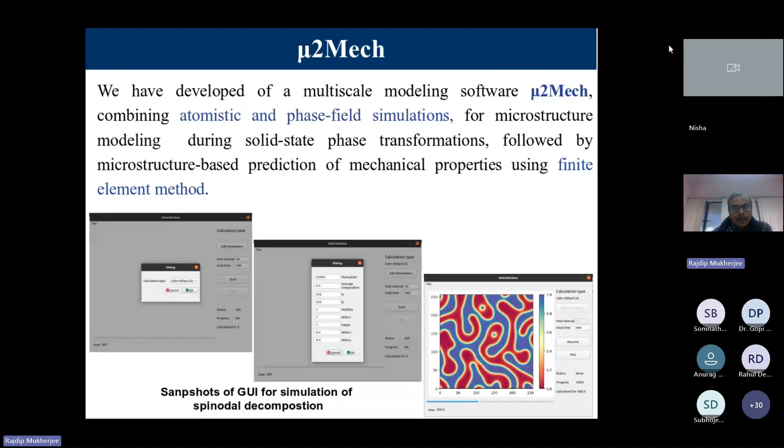So next up, I am showing you a few online resources. This will be shared with you after this workshop. So the first one is the GitHub link where we have the open source software, as you know. So you will get the source code for this μ2Mech, right?

So there is a background C code there, which is for phase field modeling. And see all these source files for μ2Mech, because in μ2Mech, the front end is a graphical user interface, but in the back end there is a C program running, which is solving mostly the differential equations related to phase field modeling, right? And those codes will be available on github.com, and also the installation procedure.

It is already installed in Param Sanganak, but you may want to install it in your own laptop, which has a Linux system or Ubuntu or CentOS. So you can directly download from this GitHub link, and then you can install it in your own desktop as well. Okay.

And then I'll provide you a link of a paper which we published, which is μ2Mech, a software package combining microstructure modeling and mechanical property prediction. And this paper contains all the screenshots of the software, how to install it, what are the basic algorithms that we have followed in this software, the example of iron chromium alloy, how we simulated this thing, how it can be exported to OOF2.

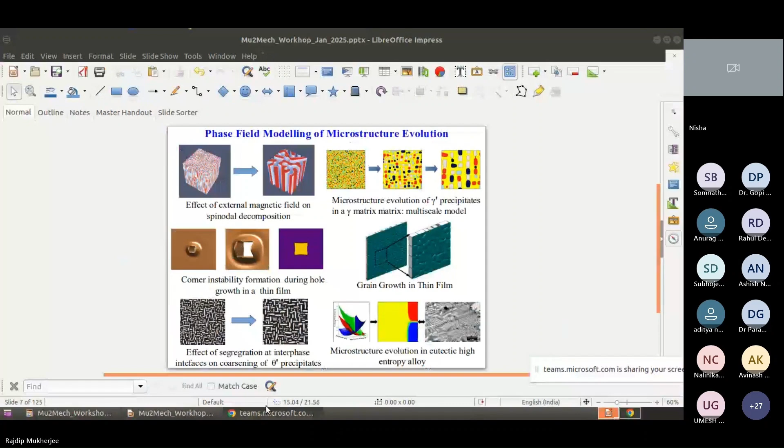Ms. Agarwal, just there is a call. Yeah, I think you are not audible. Oh, sorry. I think I am not audible, right? Yeah, now I am audible. Now it is fine. Yes, yes. Yes. So thank you. So I will start again.

So the first figure you can see is the effect of external magnetic field on spinodal decomposition, and I will go more into spinodal decomposition later, where we'll see this is a two-phase microstructure evolution, and one of the phases may be ferromagnetic, one of the phases may be paramagnetic in nature, and using an external magnetic field, we can align these phases in particular directions, and we can change its properties, right?

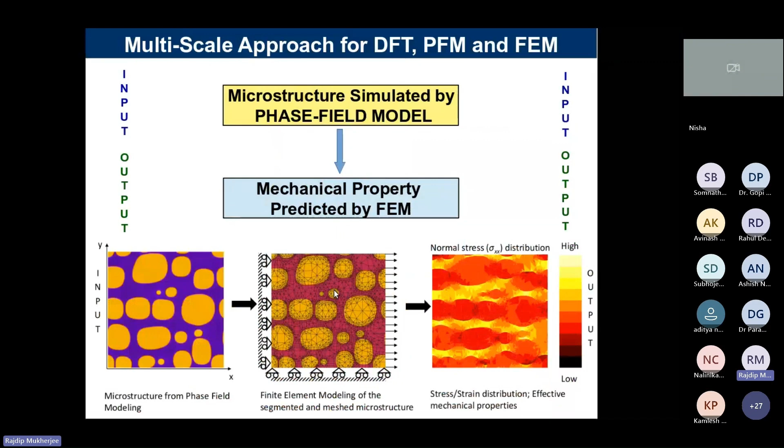So next, this microstructure prediction will be done using OOF, object-oriented finite element software tool for predicting effective properties from the microstructure. This is an open source software based on Python and C++ and can be integrated with other open source software and can be used to analyze two-dimensional and 3D microstructures as well. So this is a fully capable standalone software and its generated 2D/3D mesh can be exported to commercial finite element softwares for elastoplastic and other nonlinear analysis. But most of these things will be discussed in the second demonstration.

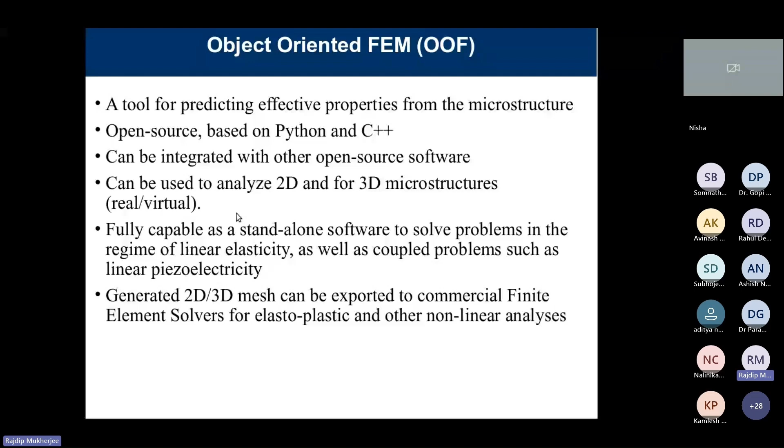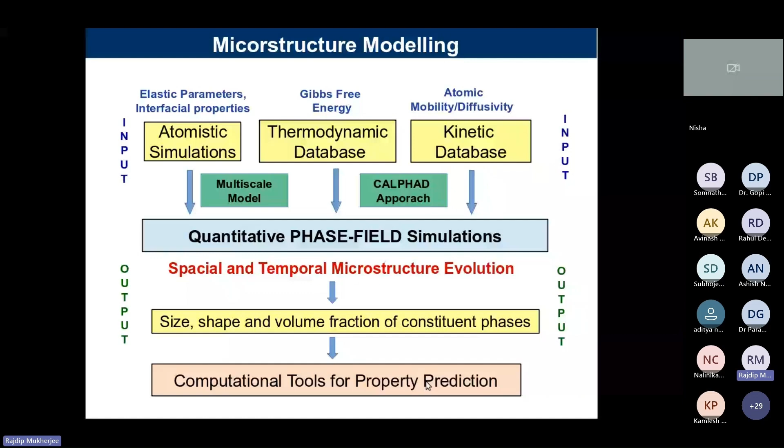But I am skipping this part because this will be covered by Albert in the first demonstration session in the afternoon. As I told you, there will be two demonstration sessions. One will be the front end of the software, and you will get a hands-on session for the graphical user interface. There will be some post-processing tools also involved. That is the very important part. That's demonstration one and the hands-on session. And the second demonstration will be related to mechanical property prediction, which is related to the OOF2 software.

So now we know that. Till now, does anyone have any question? Because this forms the basic background of the software. If you have any question, you can ask me. Then I'll go to the next part of this lecture, where we'll discuss some examples of phase field modeling, microstructure evolution, and also discuss a little bit about the solid solution model. So if anyone has any question or any doubt, please ask me. If not, then I'll go to the next slide.

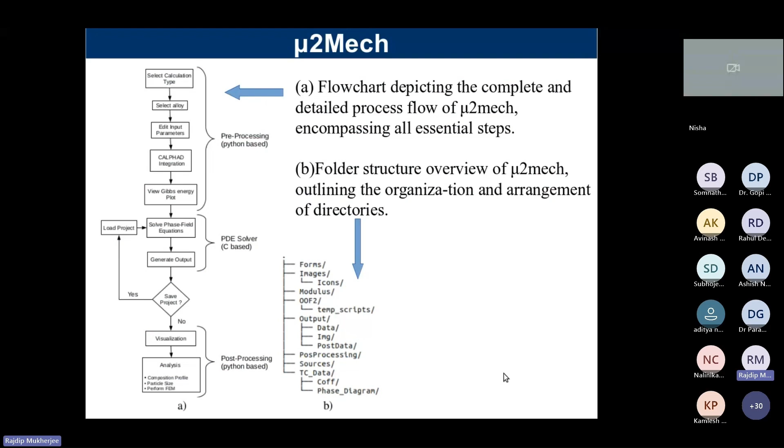Now we'll discuss. There is a question in the chat. Yes, what is the question? Can we check the microstructure evolution of eutectic solution? Eutectic solution. I don't get it. Is this question in the chat box or somewhere? Yes, in the chat window. I'll just check the chat.

Sir, can we check the microstructure evolution in eutectic solutions? Yes, it is possible. Microstructure evolution of eutectic solution is a phase field model, although it is not integrated right now with M2Mech, but because this is open source software, we can always add the modules. Eutectic solutions are basically where we have a transformation from one liquid to two solid phases, if it's a simple binary alloy. There may be ternary eutectics also, or multi-component.

But we can think of simple binary eutectic alloys such as lead-tin eutectics. That kind of thing you can do easily. There you can see the solidification of the alloy, and that is also a diffusion-controlled process. A liquid phase is transforming into two solid phases. I have shown you for the high entropy alloy in a slide where we have all the examples. So I will go back quickly.

Yes, sir. So here you can see this is the eutectic solidification, right? In a high entropy alloy. Yes, tell me. Yes, sir.

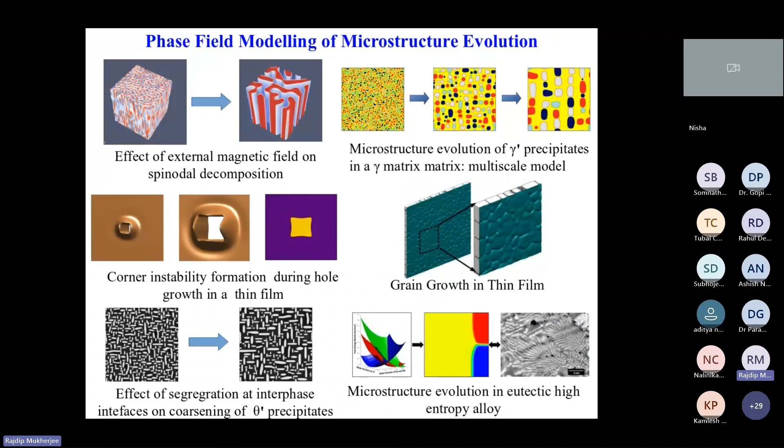So now we are going to a phase field model. What are the basics of phase field model? In the next half an hour, probably I'll cover this example of phase field model and also a little bit of solid solution model. A phase field model is a diffuse interface model. Analytical models are mostly sharp interface models, where there's an interface you need to track between the two phases.

So we are mostly discussing multi-component, multi-phase field models, where the alloy has more than one element and multiple phases are involved. For simplicity, in this workshop we are only working on a binary alloy. Binary alloy means two component alloy, and there are two phases. But it is also possible that three phases are involved, like in eutectic solidification: a liquid and two solid phases.

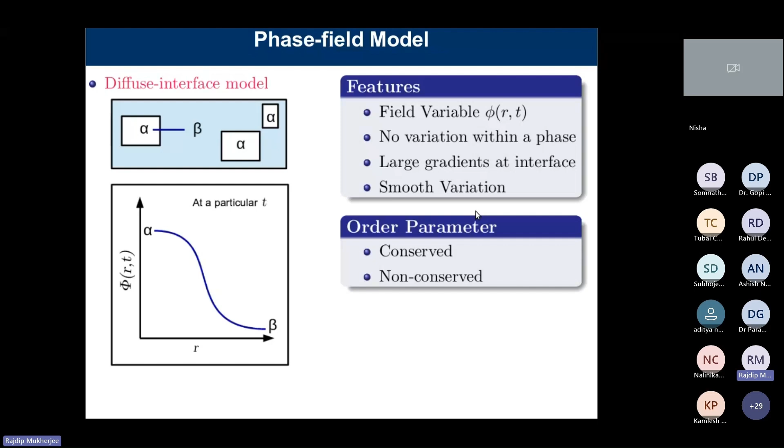For these conserved and non-conserved field variables, we generally solve two very basic equations, and there are some more complicated variations of these equations. One is very similar to our diffusion equation. Many of you know Fick's second law, right?

So what is the driving force for atoms to diffuse? These are all diffusive phase transformations, whether solidification or solid state phase transformation, where phase separation occurs. If you have A and B atoms, A-rich and B-rich phases form during phase separation, and diffusion is involved. So in Fick's law, what is the driving force for diffusion? This is the concentration gradient, right?

And this concentration gradient basically drives the diffusion. So there we can see the diffusion equation, which is like del C del T equal to D grad square C, right? So the atom moves from higher concentration to lower concentration, right? Like a drop of ink in the water, it will diffuse into the water, right?

But here we are solving an equation which is very similar to a diffusion equation, which is del C del T equal to M grad square mu. And this mu is the chemical potential. M is the atomic mobility, C is the composition, T is the time, right? And you can see here.

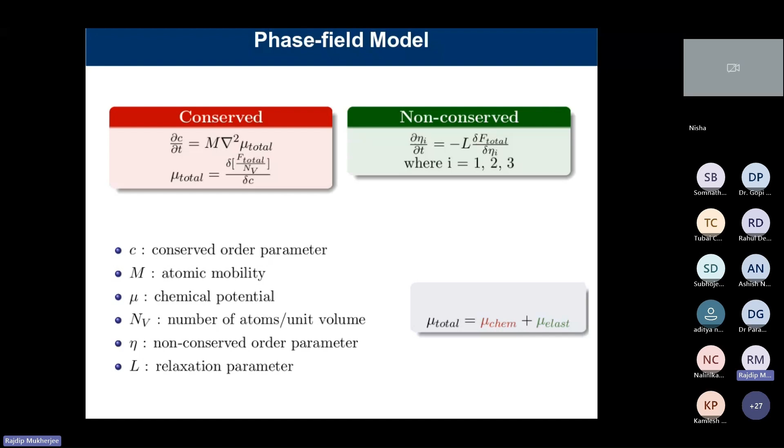But if you want to calculate the effect of a magnetic field, then there will be another mu magnetic. So the chemical potential will have several parts. The chemical part will always be there, and there will be an elastic part. Electric, magnetic, all these things can be incorporated so that you can see the effect of external fields on microstructure evolution. So this is a very simple kinetic equation that I am showing you.

And then, as I told you, this F total can be F chemical and F elastic. And F chemical is the bulk free energy and the gradient free energy. The bulk free energy you get from the phase diagram and the free energy diagram. And gradient free energy is related to your interfacial energy. That is the chemical part of the free energy.

Whereas for the elastic part of the free energy, when we try to calculate the elastic energy, we basically have to solve the mechanical equilibrium equation. And mechanical equilibrium is much faster than the diffusional process, because the atom has to move only a fraction of the atomic distance. So the elastic equilibrium is very fast. So we assume that at every diffusion time step, the system is in mechanical equilibrium.

So that is why we solve a mechanical equilibrium equation to get the displacement field. From there, we can get the strain field. From there, we can get the stress field, and we can calculate the elastic energy of the system and incorporate it in the total energy of the system.

So the bulk free energy part we can get from Thermo-Calc or the CALPHAD approach. The gradient free energy, the interfacial energy, we can get either from literature or from atomistic simulation. For the elastic part, we need the elastic constants from atomistic simulation and the misfit strain. Then by solving the mechanical equilibrium equation, we can get the elastic energy.

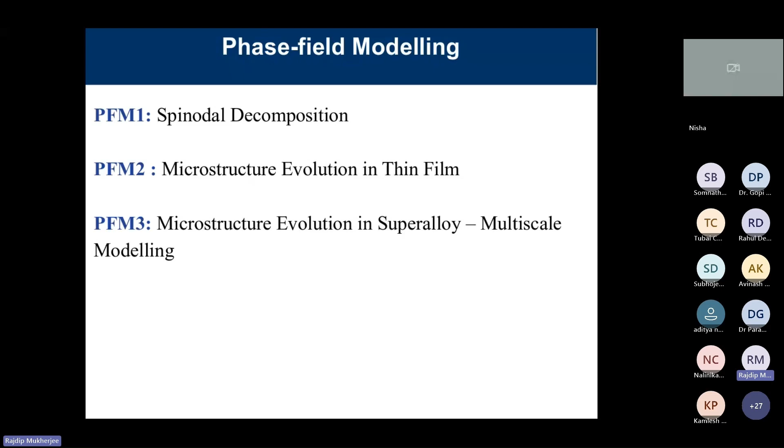And it is very important not only for metallurgical systems, but also for polymeric materials, where you can have this kind of spinodal decomposition take place, right? In functional materials also, like ferromagnetic to paramagnetic phases. So we start with spinodal decomposition. This is a kind of phase transformation, like eutectic solidification or precipitation. This is also a kind of phase separation where an alloy decomposes into 2 or more phases, right?

Say for magnetic systems, one of the phases may be ferromagnetic embedded in a paramagnetic matrix. So it can form hard magnets, because when you have small ferromagnetic phase-separated phases embedded in a paramagnetic matrix, and you align them in a particular direction, they can act as elongated single domains. So in magnetic materials, hard magnets, this is very, very important.

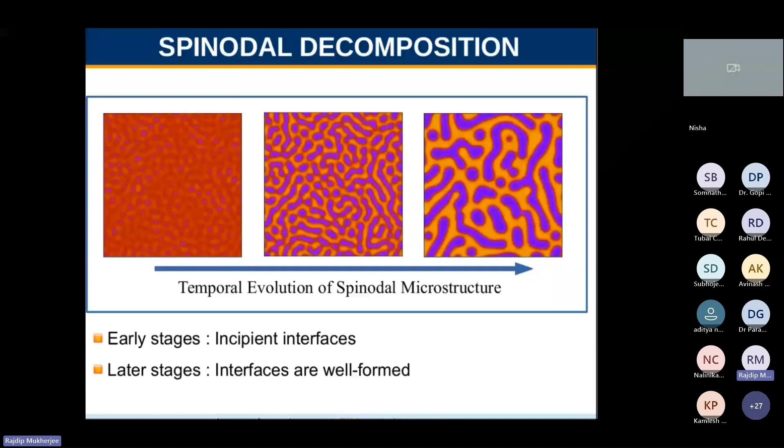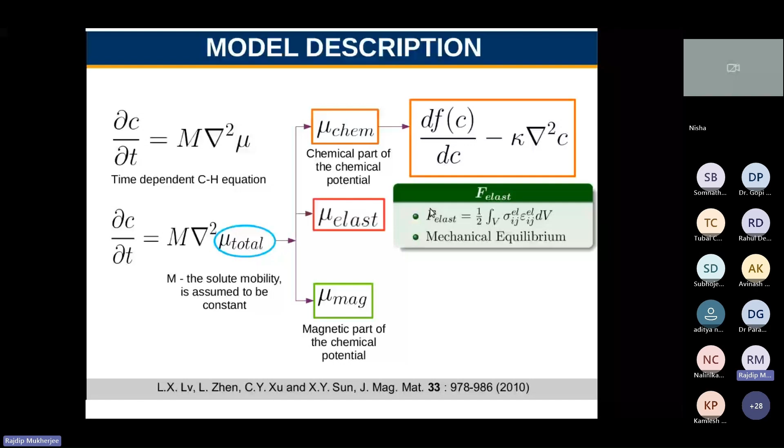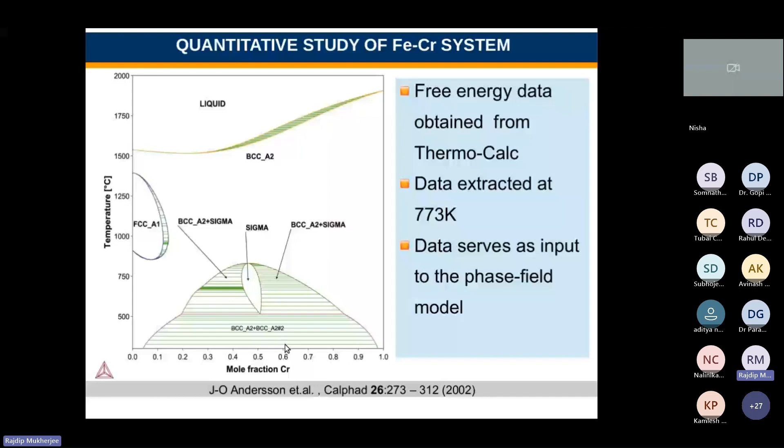So what is the CALPHAD approach? Because we are talking all about the CALPHAD approach where we get this free energy, right? So the CALPHAD method enables the calculation of phase diagrams. Unless you know the phase diagram of an alloy system, you cannot simulate what will be the microstructure, right? So the phase diagram and the free energy diagram are the two important thermodynamic data sets we need to simulate microstructure evolution.

The kinetic data set is also important because it tells how quickly it is evolving, meaning what will be the time scale. If you don't know the diffusivity value, you cannot tell what will be the effect of temperature, say, right? With increasing temperature, the diffusivity increases in an exponential manner, right? So those things we can get using the CALPHAD approach.

And software like Thermo-Calc, OpenCalphad or Pandat all have student versions also, where you can get defined databases like aluminum, silicon, iron, copper, nickel, titanium. All these databases you can load in the software's calculation program. And then you can get graphs and tables, meaning you can get the phase diagram, the free energy diagram, and free energies as a function of composition, right?

So it is very important: if you learn this CALPHAD approach, you have a good understanding of the phase diagram and the free energy diagram of a system. And when you plot the free energy diagram, you can see this is a particular free energy diagram for the iron-chromium system without a magnetic part, where again the free energy is a double-well kind of potential, and when you incorporate the magnetic part, it will look like this.

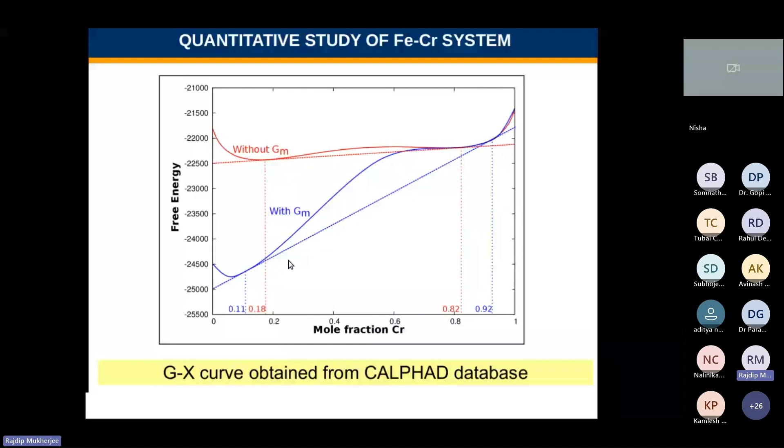This data is very important because if we feed it as input to a phase field model, we can see how the microstructure evolves with time. So how do we solve this differential equation? We solve it in Fourier space. We can use different numerical techniques like the finite difference technique or finite element technique. But here we solve the partial differential equation in Fourier space, because in microstructure evolution we are basically solving a very small part of the microstructure, which is periodic in nature, right?

And what is the advantage of solving in Fourier space? Because it's a 4th order equation, it becomes a 1st order equation in Fourier space, the numerical stability will be much higher, and we can solve it very easily, right? So the solution is very fast. And this is a semi-implicit Fourier spectral technique, which you can also find in the literature, for how we solve this differential equation in the background.

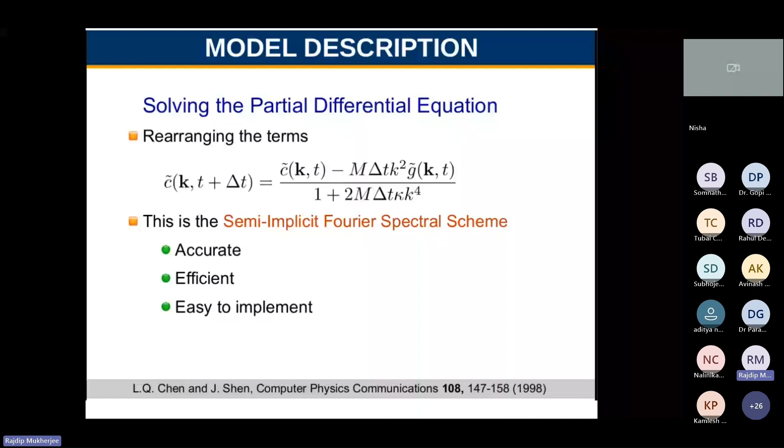So numerically, why semi-implicit Fourier spectral? As I'm telling, there is a maximum allowable time step, delta T max, right? We are going in time, right? With time, how it is evolving. We can use a larger time step in this case, so the microstructure will evolve quickly in our computers. So that is why mostly we use this Fourier spectral scheme.

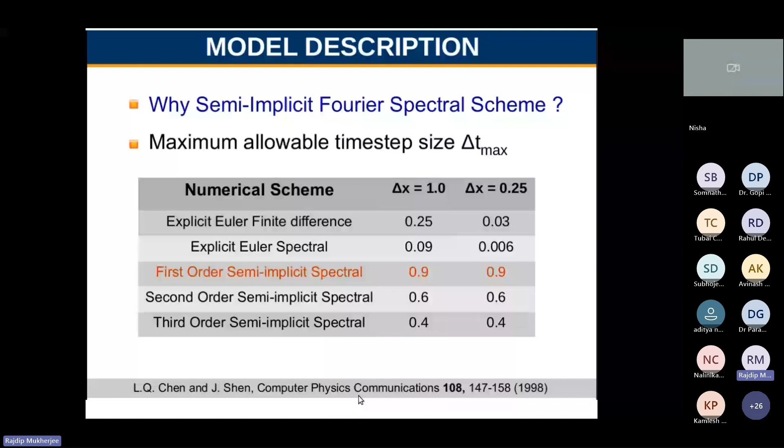So you can follow this Chen and Shen paper in Computer Physics Communications that describes this numerical technique in detail, how we can solve a partial differential equation using the Fourier transform technique. Then these are the microstructures where you can see this is no external field, this is only elastic field or only magnetic field, and you can see what is the effect of elastic field and magnetic field on microstructure evolution, right?

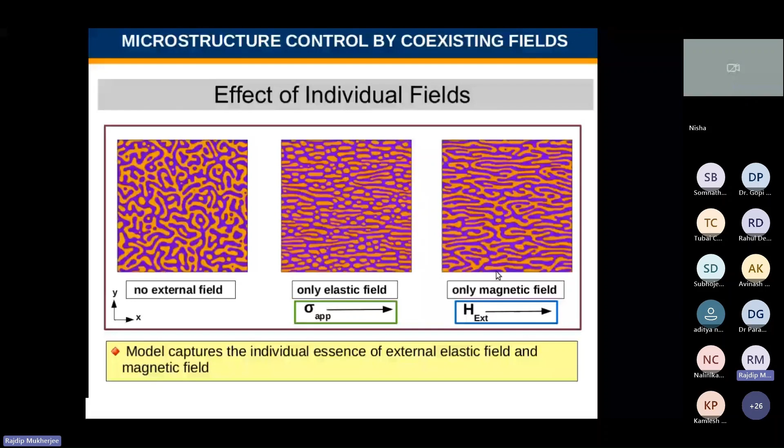Okay, so there is something like AI/ML these days people are using, artificial intelligence, machine learning. So from this μ2mech, you will get a set of data, right? The microstructure at defined composition and defined temperature. And this kind of data can be used for AI/ML applications as well, right? Because if you want to simulate large microstructure for an alloy system, it is time consuming, right? But with fewer calculations, machine learning techniques can be used for generalized time dependent series, and it gives a significant reduction in time and computational power requirement.

So data which we are generating from μ2mech, means a set of microstructures or set of compositional information at different temperature, different time, you can use as a training data set for an AI/ML model, like an LSTM kind of model, long short-term memory model. If you know, some of you; I am not discussing this thing. This is not part of μ2mech, but you can always use this data set as an input, a training set for a machine learning model. And then this machine learning model you can directly use for prediction of microstructure evolution quickly.

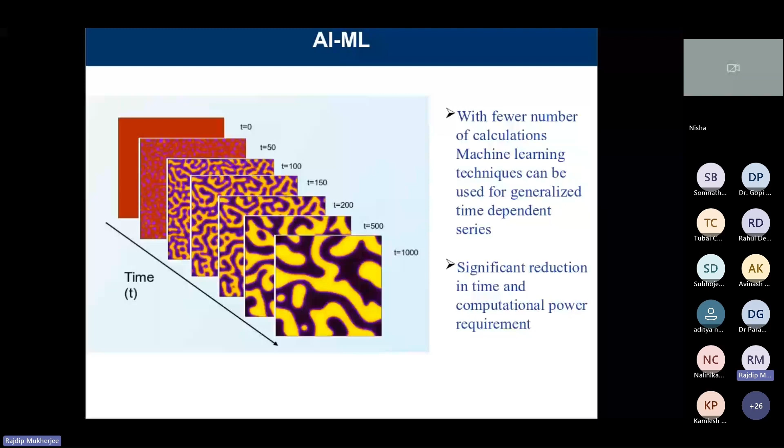Okay, next, I'll just quickly discuss, we don't have much time left. So I'll quickly discuss what is a solid solution model, because that is what we are using in CALPHAD, right? And these solid solution models are incorporated in our phase field model. So a solid solution model can be ideal, regular, subregular solution model. And in the CALPHAD method, we use something called Redlich-Kister polynomial, right? So once we get the free energy versus composition diagrams for a binary phase diagram, we fit it into a polynomial equation, and the coefficients of that polynomial we use in our phase field model.

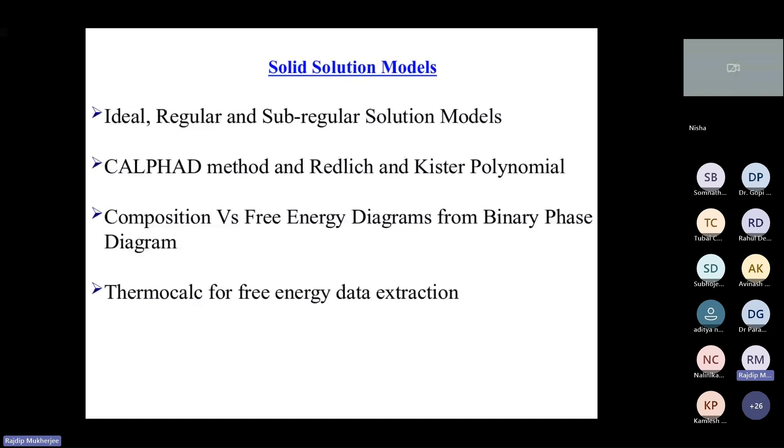So for pure substances, there is a single component system. All phases have the same composition, but in alloys, however, composition is also variable. To understand the phase changes in alloys requires appreciation of how the Gibbs free energy of a given phase depends on composition as well as temperature and pressure. So in binary solutions, you can see XA plus XB equal to 1, right? The mole fraction of A plus mole fraction of B equal to 1. So the Gibbs free energy of a binary solution of A and B atoms can be calculated from the free energies of pure A and pure B in the following way. So if you know the free energy as a function of XB, you also know it as a function of XA, right?

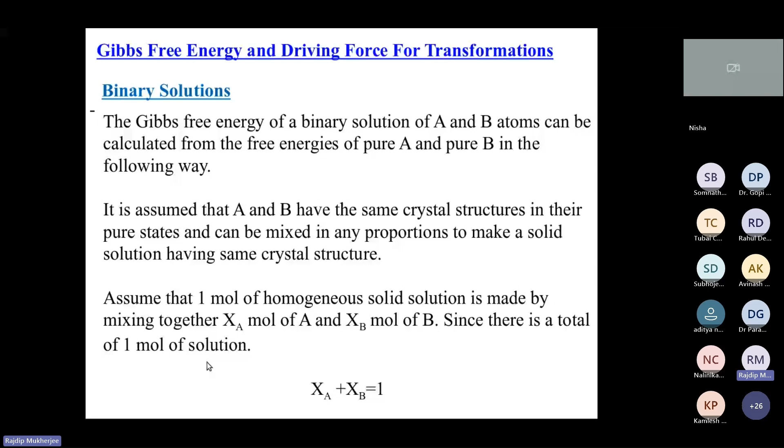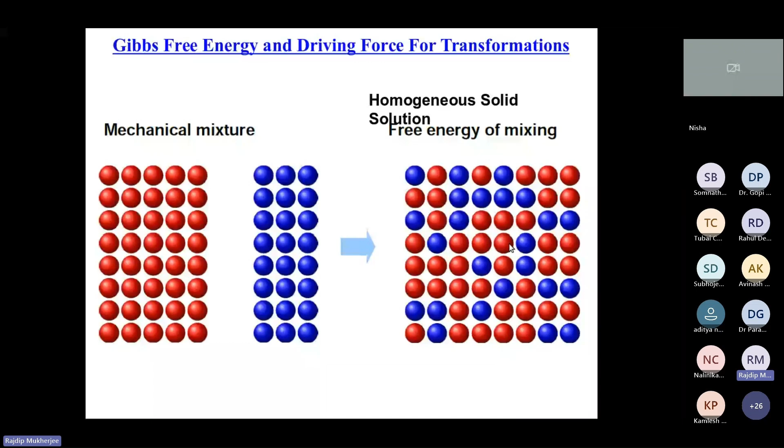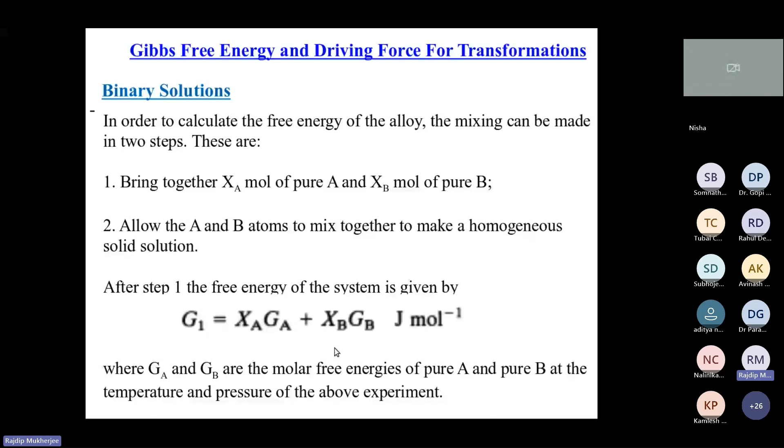So the simplest possible Gibbs free energy is when you have a mechanical mixture, means A atoms and B atoms you are keeping side by side; this is called a mechanical mixture. But when they are mixed together, there is an enthalpy of mixing and the entropy of mixing you also need to know, right? So when you have a mechanical mixture, G1 you can calculate as XA GA plus XB GB. But when you are mixing these two different kinds of atoms, that is what you are doing in alloys, you have XA GA plus XB GB, but you also have a delta G mix. That is, the enthalpy and entropy of mixing will also be there, right?

Because the enthalpy and entropy are also going to change in the system. And entropy is mostly the configurational entropy, right? Right now we discussed how the number of red balls can be arranged in a number of blue balls. That is, how many configurations are possible, right? So these two terms are very important.

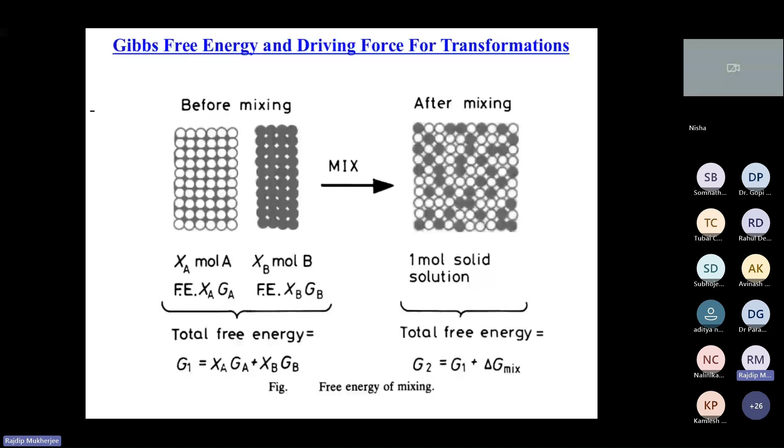So if you know the enthalpy and entropy of mixing, then you can calculate what will be the free energy after mixing. So you can see from this figure, once these two different kinds of atoms are mixed, if this is the Gibbs free energy for A atoms and this is the free energy of the B atom at a particular temperature, when you mix them together in a particular mole fraction, this free energy may decrease or increase, right? And it depends on what is the energy of mixing.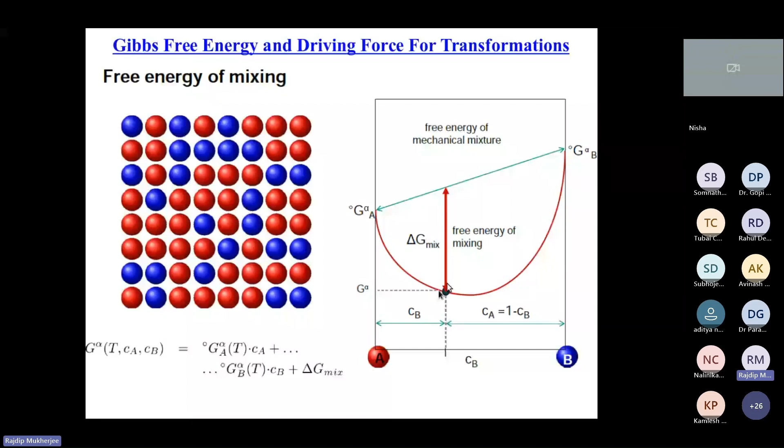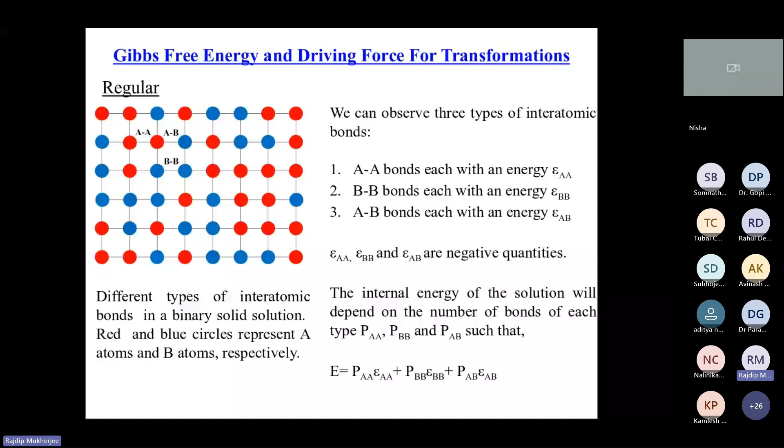And for this energy of mixing, there are different solution models. I am not discussing them. The ideal solution model, there are regular solution models where the enthalpy term is also there, and there may be a sub-regular solution model.

But here you can see in some cases this kind of double well potential also. When you have pure A and pure B, if you mix them together, you will get a free energy which looks like a double well potential, which is very typical of spinodal decomposition, right? So this kind of free energy is important for today's workshop, and that is what we are going to discuss. And this kind of free energy you can obtain from CALPHAD models, right?

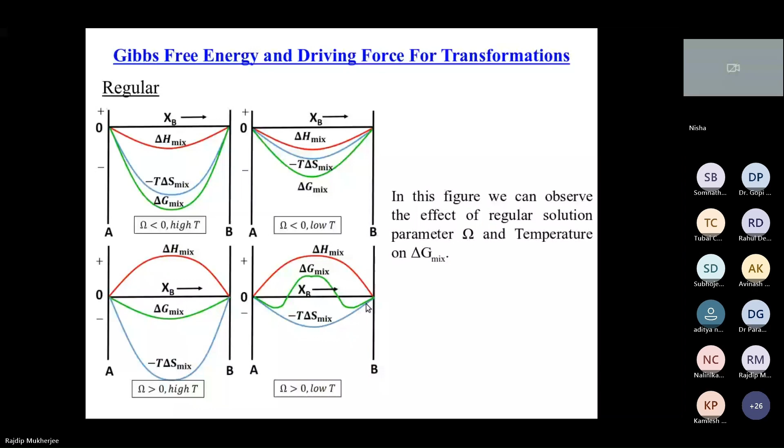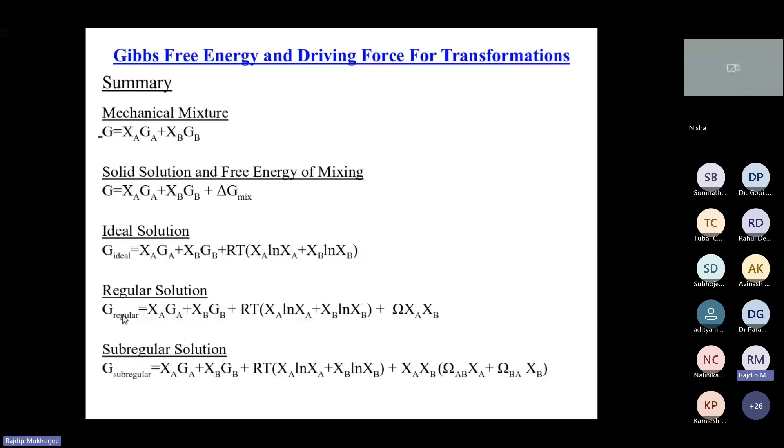So finally, we have different kinds of models. You can read about them: the mechanical mixture, solid solution models for free energy of mixing, ideal solution, regular solution, sub-regular solution. But ultimately, we need more complicated polynomials which can fit a free energy, also known as Redlich-Kister polynomials, where you have multi-component and multi-phase systems, right? So not only for binary or ternary. So in CALPHAD we basically have these kinds of polynomials for the mixing energy in the Gibbs free energy, right?

Because in 1 hour it's not possible to describe everything. So if you are interested, you can go back to a phase transformation book like the Porter and Easterling book or any thermodynamics book to read about solid solution models. And then you can use Thermo-Calc to calculate the Gibbs free energy, because that is important to run the diffusion equation, because the chemical potential comes from the free energy.

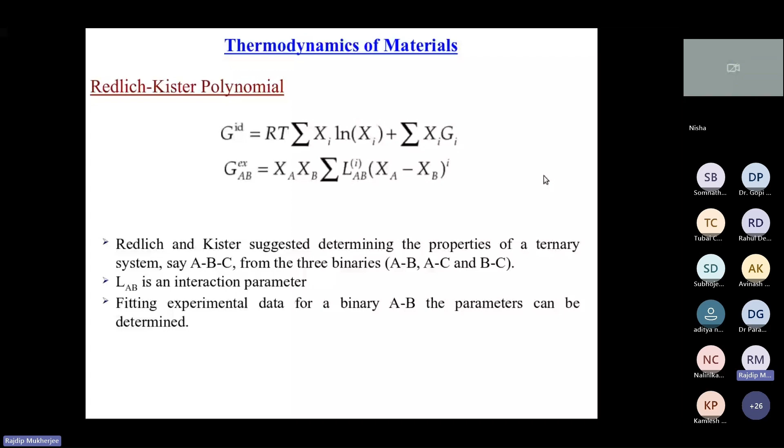So say for the T3 temperature, which is below the eutectic temperature, liquid is solidified into two phases, alpha 1 and alpha 2. So you can see at T3, the liquid phase free energy will be higher, while the solid phase free energy will be lower. That means at this temperature, the solid phase is more stable, and the liquid will decompose into two solid phases, and their equilibrium composition will be dictated by these common tangent points, right? So this will be the composition of alpha 1 and alpha 2 when the liquid decomposes into two solid phases.

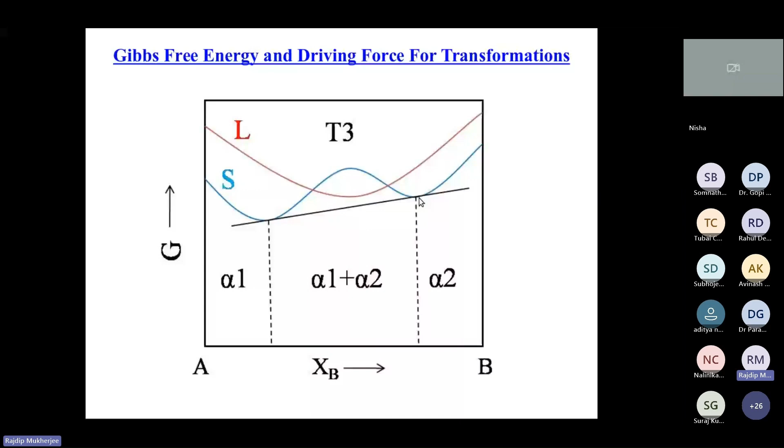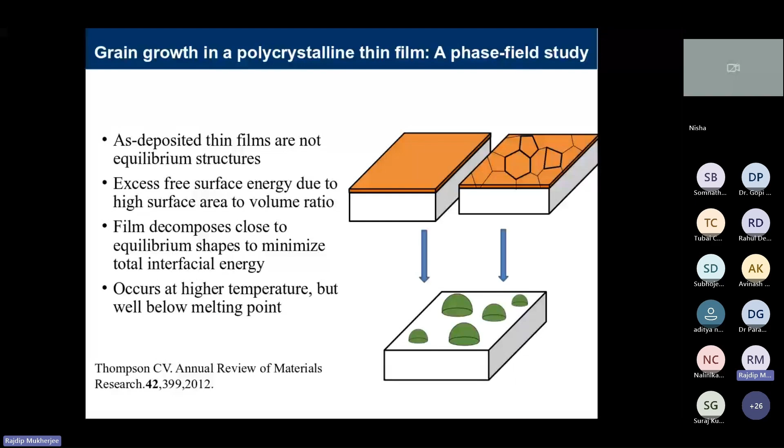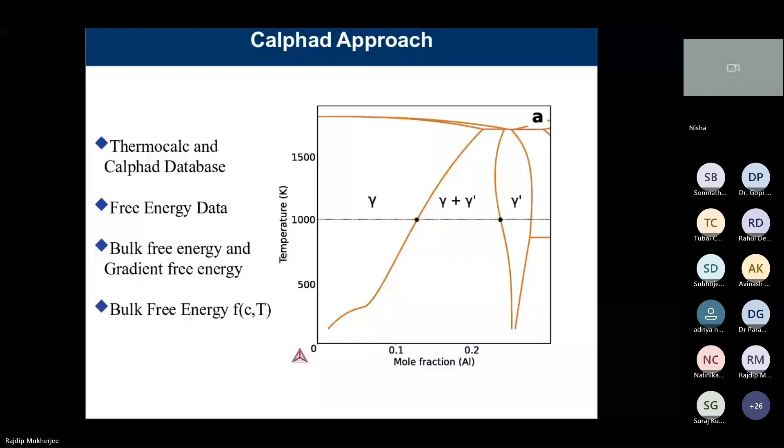Okay, so I think I have covered many things in this last 1 hour. There were many more slides for different kinds of systems where we use this kind of phase field simulation, like grain growth in thin film, or a nickel-based superalloy I had discussed. It is also possible using a phase field model to simulate this kind of microstructure evolution like coarsening, and then using this microstructure with OOF2, you can predict the properties also.

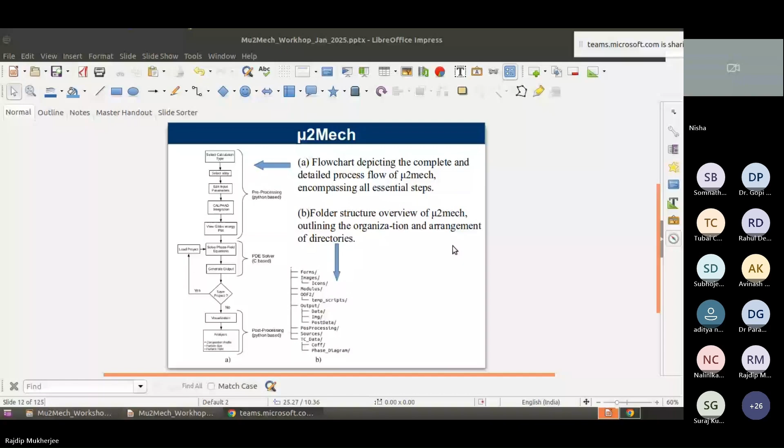You can also have a question and answer session in the evening. At that time you can also ask many things about the phase field model, how it is incorporated. In the afternoon session during the demonstration, it will be more clear when we demonstrate how this spinodal decomposition we can simulate using the software.